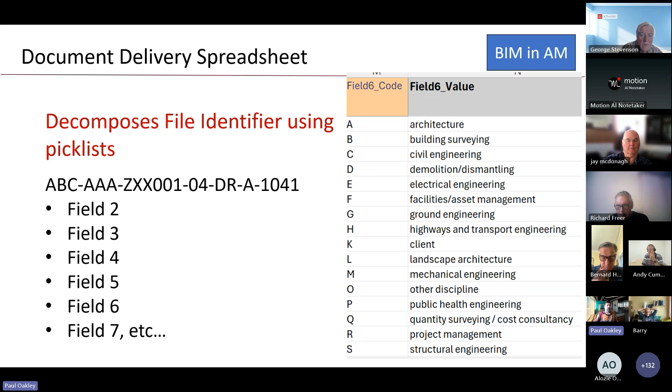And then we also decomposed the file identifiers. So under BS or ISO 19650, we know that whereas a dash A, basically that's architecture, etc. We knew that ZXX001 was building 1, 04 was level 4. So from the coding, the fields, we could actually put some metadata against the files. We also knew where the description was, in terms of the length for particular file lengths, and we could also get the file types. So if we knew it was a DWG, we know it's an Autodesk drawing file. So this basically allowed us to add to the metadata to deal with it.

So we've gone through, as I said, 17,000 odd files, restructured the whole project using these utilities and time. And hopefully now we've got a much better chance of being able to find the information that we trust, because no longer have we got all the duplicates that were all over the place. And there's even multiple revisions of the same file sometimes, but we've still kept the history and the audit trail.

Thank you, Paul. That's excellent. So the principal idea here is that these are the sorts of tools, processes, and utilities that the members of the consulting group of the Golden Thread Task Force will have access to. So if you are a data geek, as it were, interested in doing that, don't take that the wrong way, Paul, then we can share that with you. So maybe put data management into the chat.

Okay, Ahmed. Hi there. Richard, we've got a question and answer session after this. So, George, would you stop interrupting my chairing?

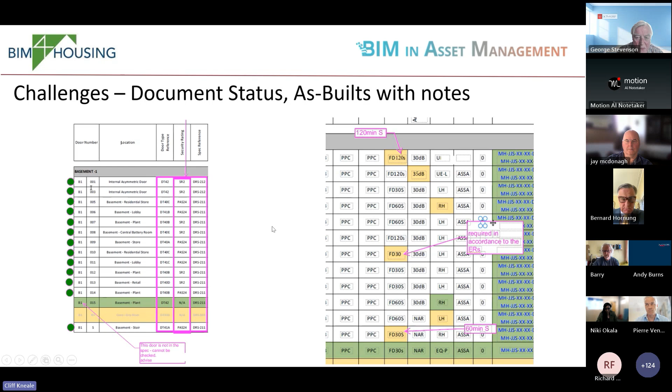Also, inside documents, you have location to be confirmed depending on the CBRE review. So has that been answered or not? Has the location been confirmed? We also have notes inside technical transmittals. Don't know whether they've been resolved. The same here, more examples.

And also Paul touched on it earlier. When you're downloading files, if the path name is too long, it'll stop downloading it, but you might just get the file path, with nothing in it, the file will actually be empty.

So that's another difficulty. Also, sometimes you're given information, you're just given maybe a login to a system, and when you go to the system, you find that you've got to find your way around the folder naming convention, the file naming convention, and you'll find that there are zip files.

It looks pretty simple when you open that, but you might find that this zip file contains zip files as well, and those zip files will contain trees and folder structures inside there with files, and you've got to sort of unpick it all and peel it all apart and put it all back together again.

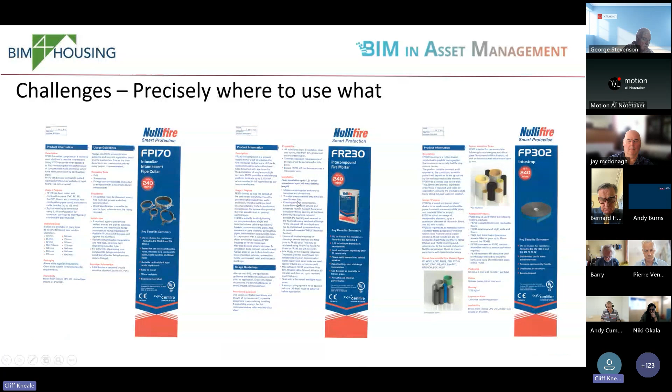Also, when it comes down to fire stopping, we noted that whilst the drawings actually indicated where the fire stopping was, it wasn't clear which product you would use in that location. And we found 9 different products, but it's unclear as to which product to use where.

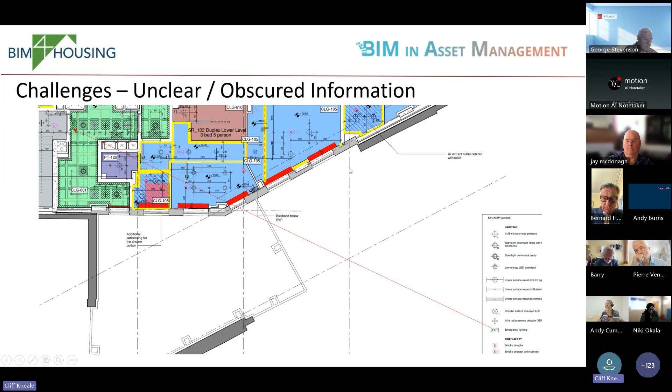On the reflected ceiling plan, we noticed that it's very illegible. There's an emergency light here, just underneath here somewhere. So in order to find that, you're going to have to open the document, zoom in and pan around so that it's almost very, very large on the screen. So unclear, obscured information is another problem. Even though I'm zoomed right in now, you can just about read the fact that there's an emergency exit light there.

I've also got difficulties with, there's a document number here, and that's the document, and this file is attached to it. When you download all the information from some of these systems, you're not sure whether you're actually getting all of the information, because some of it is embedded, some of it is linked. So it might say you've got 1,500 files. By the time you've downloaded it, you might only have 1,000, or you might have 2,000. So you can never really be sure whether or not you have all the information about the building.

So this little bit is focused specifically on Regulation 38. Let's say you were working for a housing association and you were asked to make yourself familiar with this building and find out about the emergency lighting.

So you might start off with the fire safety manual, which would tell you the emergency lighting. To look for it, you need to look at the fire strategy, MEP consultant specifications, electrical lighting record drawings, architect's reflected ceiling plan, the health and safety file. For testing and commissioning, you need to go here. For associated record drawings, you need to go here. And for installers details, installer competence, product details, specifications, and any assumptions, you need to look in this package.

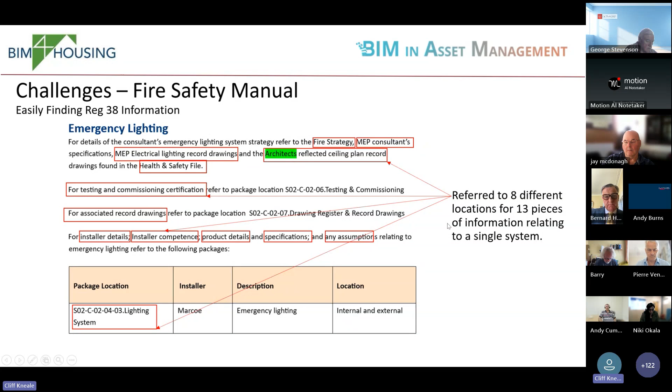So you need to refer to 8 different locations for 13 different pieces of information just for one system.

And this is what this looks like. So you go into the system and type in fire strategy or emergency lighting, and you will find some information in some of the documents. Once you've found the document, you open it and get little snippets of information everywhere.

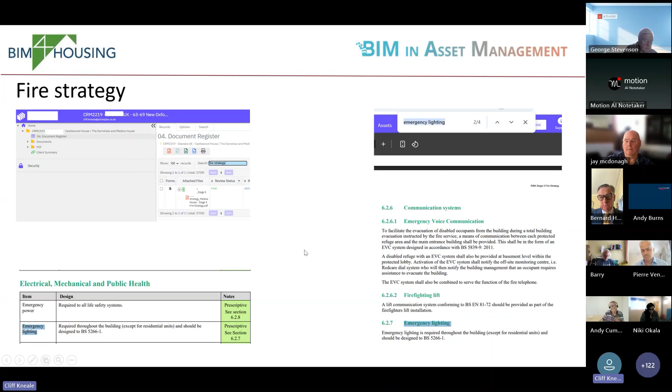You might find a specification, all about British standards that need to be met. Again, snippets of information, just from searching for emergency lighting. This is also tender issue. Is that correct? Should we be looking at tender issue at handover? Maybe this needs to be updated.

When you're looking at the specifications, you start to get some images, so it starts to make a bit more sense. Emergency backup - you might want to assume that is emergency light. You can make that assumption, but maybe it isn't. Maybe it's just the backup that's emergency.

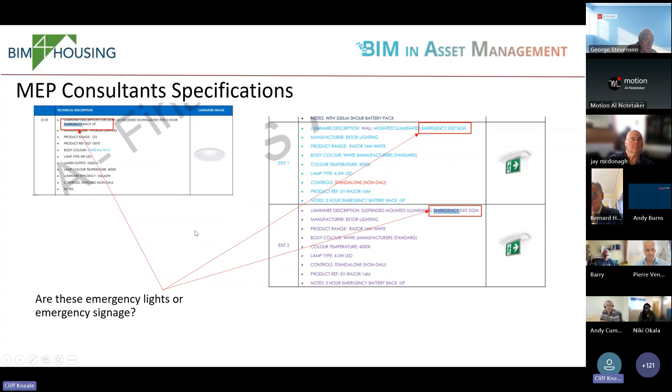And then you find something here. This looks like an emergency exit sign to me. So maybe that's it, but without actually knowing, you're confronted with maybe hundreds of different lights, and it's for you to determine which ones are actually part of the emergency lighting system.

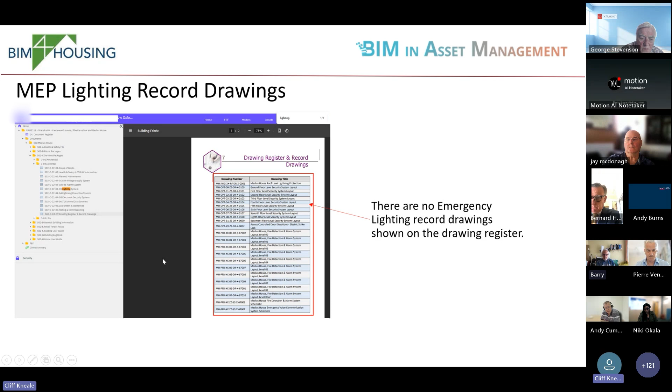So looking at the record drawings now for MEP, you're going into the health and safety file. It lists out the drawings, and there were no drawings titled emergency lighting. Again, back onto the reflected ceiling plan, the next place to look. We've already looked at this a little bit earlier, so you've got to zoom right in to find anything.

Then you find something that's quite useful - a schedule of testing and commissioning, and it does mention emergency lighting here. But it doesn't actually give you any more information other than whether or not it's being tested.

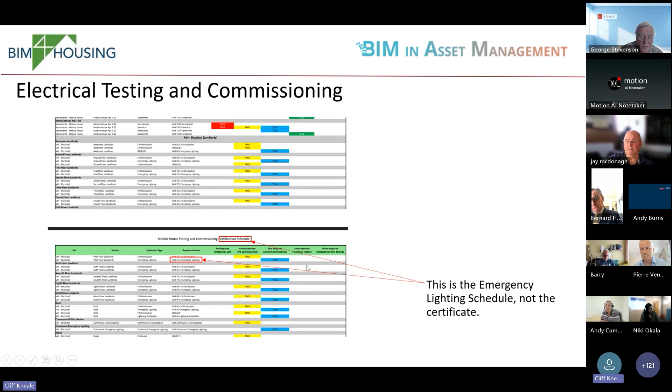So you look into the next section you're directed to from the fire safety manual, which was the electrical testing and commissioning, and start to piece together these document references. It's 6.12, and if you look carefully at the document reference, you can see S02, section C-02 612, and after a while of looking at it, you think, okay, so that's what that document is, and there it is. So you have to do quite a lot of reading and squinting, and lots of cups of coffee to get through this, believe you me.

You open it up, you've got the emergency lighting certificate, and then you've got this reference here and the type, and a drawing number as well. So you think, okay, I'm going to go off and look for these types and these drawing numbers.

You know, this is my first day at work with this new housing association. I think I'm going to give my notice in already. Electrical testing and commissioning - I'm just putting myself in the shoes of somebody who's just started with a new company. They've been told to get their head around this building.

So you scroll down and you see these drawings, which have been photocopied and scanned in. All the pages are wobbly. Once again, if you're allowed to rotate it, you can rotate it - in this case, you weren't allowed to. You had to scroll using the zoom bars left and right, up and down, until you finally went all the way around the drawing and found out that these two were the emergency lights.

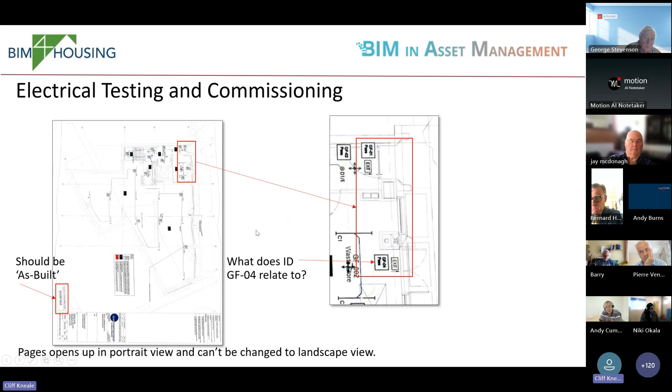Again, it says tender issue, not as built. What does ID GF04 relate to? That's unclear. Yeah, it opens up in portrait and can't be changed to landscape. Again, don't worry, I'm going as fast as I can.

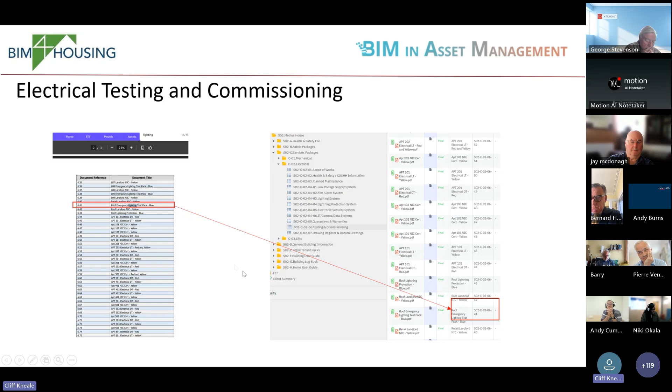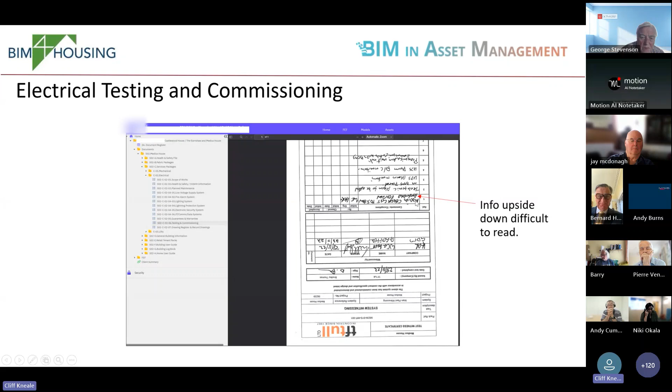So again, the same sort of scenario - you're still just trying to find out where the emergency lighting is in this building, and you're opening up more information. Here we've got a lighting certificate, section 6.98, and there's the emergency lighting certificate, and it's upside down. I can't read this writing - I probably would struggle even if it was the right way up, but yeah, no chance. So here we've got the emergency lighting certificate, so that's good.

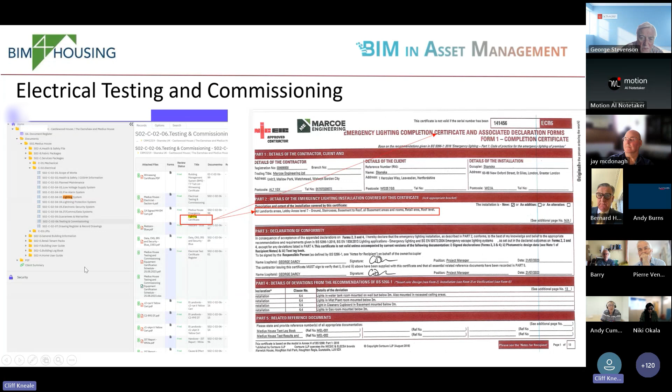Where are we now? We're looking for the associated record drawings. So my comment is, why is there not a list of relevant drawings? I'm often asked, is there a list of drawings? Is there a schedule, a list of equipment? The answer is yes, but there's not a full list or master list. You've got to go into different documents to find different lists, but nowhere is the whole list in one master list so that you can check off against it.

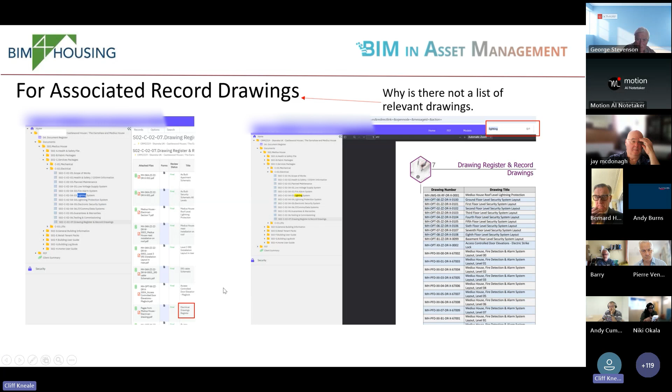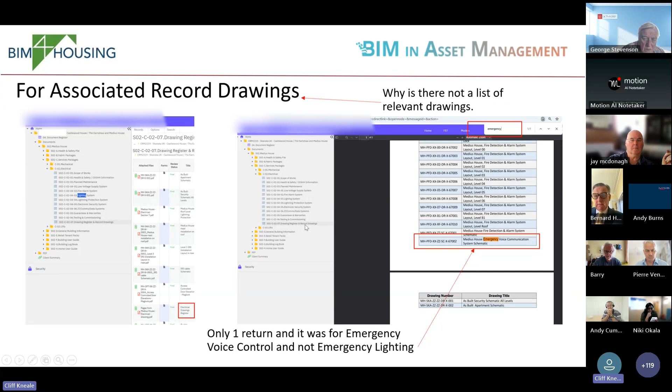So only one return for emergency voice control, and it's not emergency lighting. Again, I'm just looking inside the drawing register and record drawings. I'm looking for emergency lighting drawings. Can't find any easily. Installer details, none were found. Installer competence, none were found.

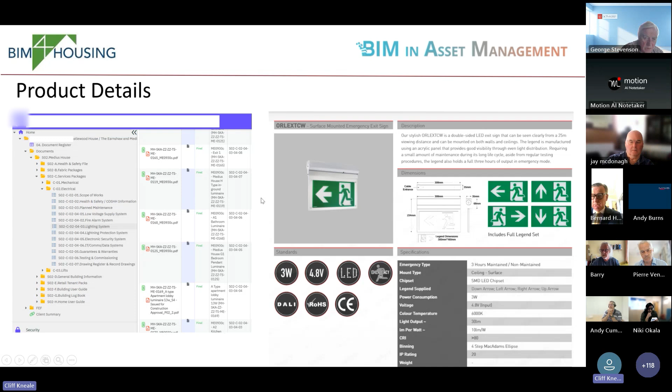This is the lighting system O&M manual, which was found in this list. Now, in the O&M manual, I then find the equipment schedule. Now, in the fire safety manual, there was no mention of the O&M manual. So it's only because I stumbled across it whilst looking for the other information that I found the O&M manual.

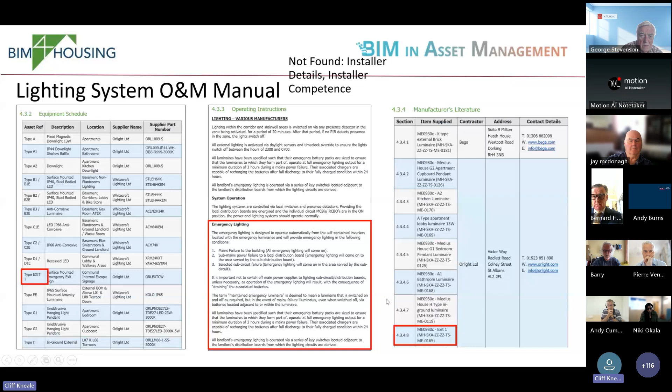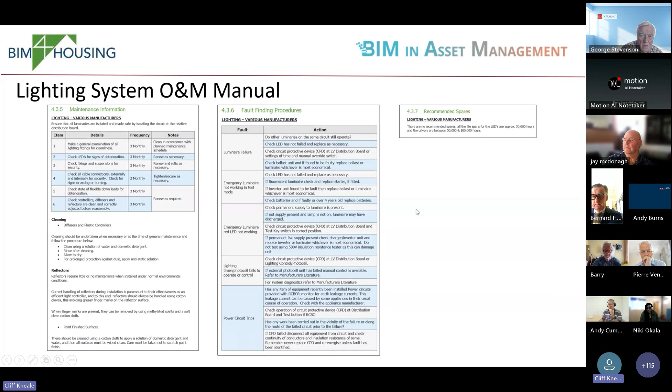When I looked in here, there's an asset reference, which is type exit 1, and that tells me it's an Orlight, and there's the supplier part number, and I can't quite remember what this was all about, but oh yeah, operating instructions also in the O&M manual, and manufacturer's literature is also in the O&M manual. So lighting systems O&M manual, this is all part of it, maintenance information, fault finding procedures and recommended spares. So that's all the information that was found on that.

Did also stumble across this drawing, which wasn't listed anywhere, but opened it up, and it's the electrical services basement lighting layout. It's not the emergency lighting, so it's all in one layout. So if you were looking for emergency lighting, you wouldn't find it. And when you zoom into this drawing, you start to see exit 1. This is the sign. So where is it?

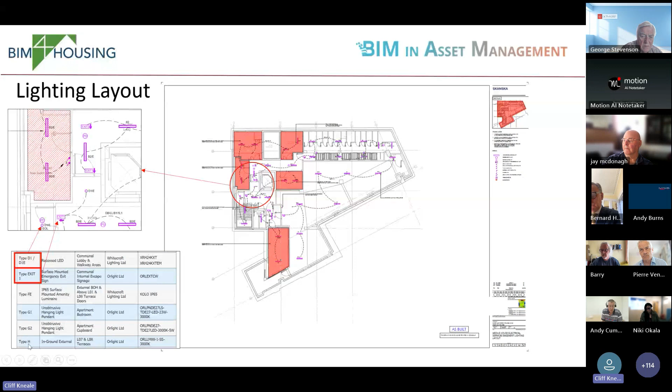Do you see this little code here, B2E? These are these codes here. So finally, the lights come on, and you're like, okay, now I get it. So basically, this is the manufacturer's way of referring to this item, and this is the drawing that you find it on. But it takes quite a long while to get there.

So some possible solutions to these. And it's not easy, really, this whole thing, but I can see a lot of improvement, and everybody is trying now to use file naming conventions, but unfortunately they're being used in different ways by different people. So it's inconsistently wrong rather than consistently wrong.